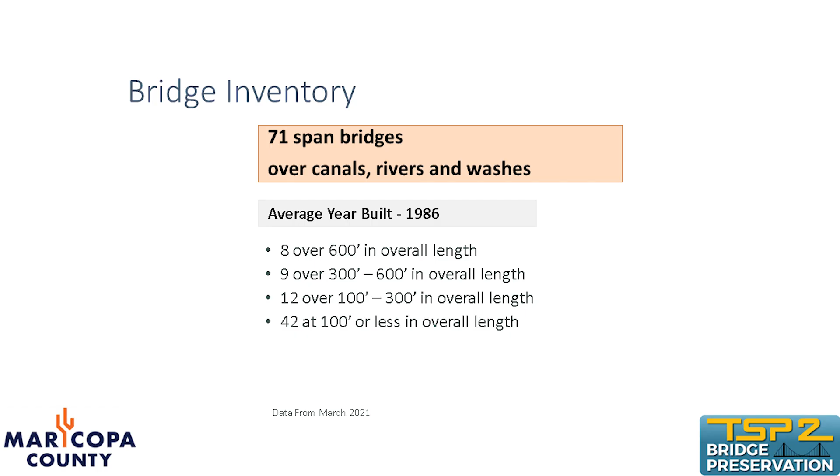We have several bridges that are pretty good size. We have 8 of them that are over 600 feet in length. Several of those are around 1,500 feet in length. They're pretty major waterway crossings. And then we have quite a few smaller, shorter bridges, and a lot of our bridges are over irrigation canals.

They have unique problems. If you've ever worked with railroads, you know how difficult it is to work with railroads. Well, irrigation companies are also somewhat difficult to work with. They usually have prior rights, and whenever you work on a bridge in their jurisdiction, you pretty much do what they tell you to do.

It's been about 6-7 years ago. Actually when I was with New Mexico, we started UHPC with New Mexico State University, and then years later I was attending a conference in Tucson, and we had a professor from ASU giving a presentation on UHPC, and he said, well, I saw that New Mexico was doing something with it, and we didn't want to be outdone by New Mexico, so we started doing something with UHPC in Arizona.

So he had worked with ADOT on a research project, and they had developed a mix at that point. And then as a county, we were interested in using it in an application. So we actually got started and did a project. UHPC, more than anything else, is somewhat like a cement rock is what you kind of end up with.

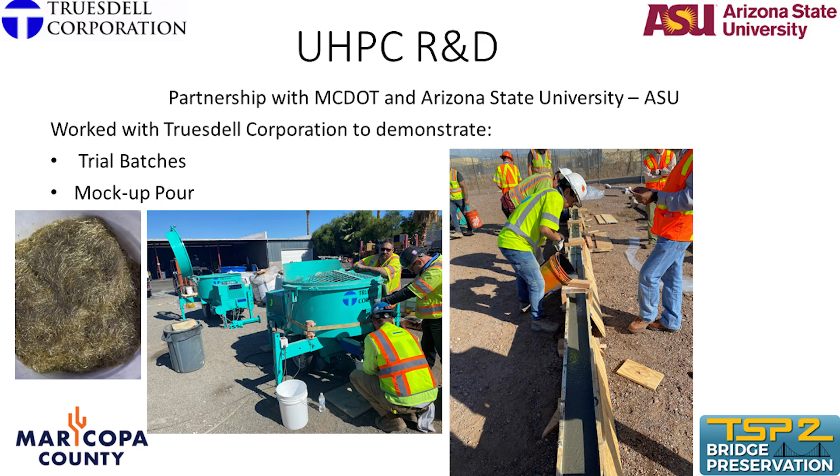And then the problem we've always had with these side-by-side pre-stressed slabs is we always use that little key joint that you just put in the little grout key, and that grout key will hold up anywhere from about 5 to 15 years, and then it's always going to fail, and then you start to get water through the joints, and then eventually the slabs start acting independently, and they don't act together as the structural engineer intended.

UHPC is a very unique material. It's a very good material. But like I say, if you go to use it, don't expect that it's just that easy of putting out a specification and the contractor's going to do it and everything's going to turn out perfect. You're going to have to spend a lot of time with it, and you're going to have other people on your team that are going to have to help you and make sure you get it right.

This was our bridge that we finished. We took the easy way out, I guess. We basically poured the joint with UHPC. In this case, I believe we used about 8 to 9 cubic yards of UHPC to fill 13 joints, and the joints were roughly 38 feet in length or so.

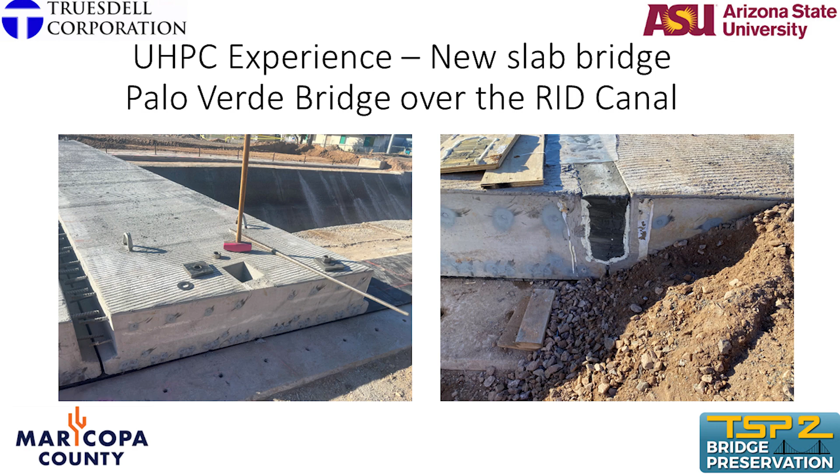And then when we were done, I know a lot of people will pour that UHPC a little bit higher and then grind it off and make it equal. I guess we took the easy way out. We covered it all with asphalt when we were done. So we were trying to make it easy for the contractor and for us and for everybody. We didn't want anybody to feel like they had to take on a lot of extra risk on something that would be problematic. So anyway, we're very happy with our structure.

Like I say, we had those UHPC reinforced keyways, and boy, I'm confident they will outlast the pre-stressed members. And the loading as you're out on the bridge now, where before we had 4-foot wide slabs, and you could see the different deflection with the existing girders, and I really don't think we'll see any leakage between the slabs anymore, so we're very, very happy.

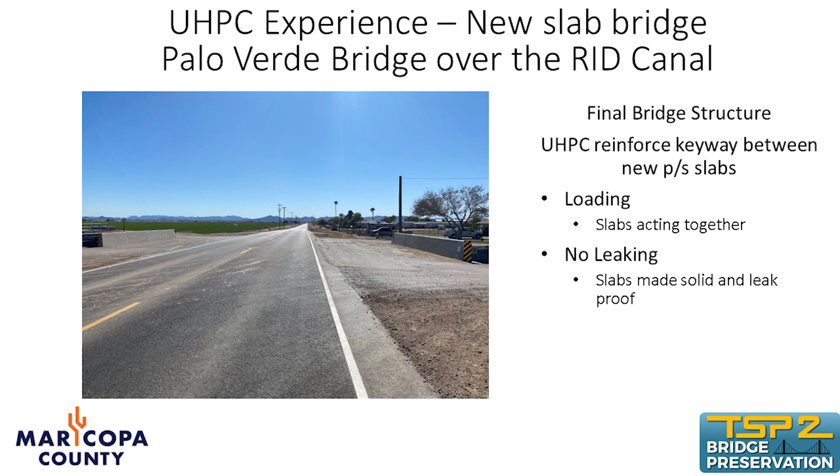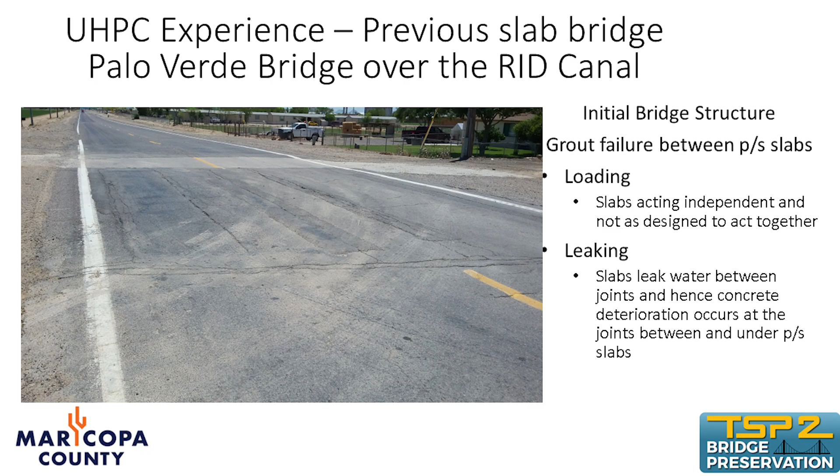I don't know if you can see these photos very well or not, but these were photos of the old bridge, and you can kind of see longitudinal gaps right over those grouted keyways. And our maintenance folks were out there about every 9 months patching the asphalt on this bridge. And this was near a dairy, and we probably had 100 to 200 trucks a day going over this bridge. And the truckers learned real quick. They would always slow down when they came to the bridge, and it was problematic.

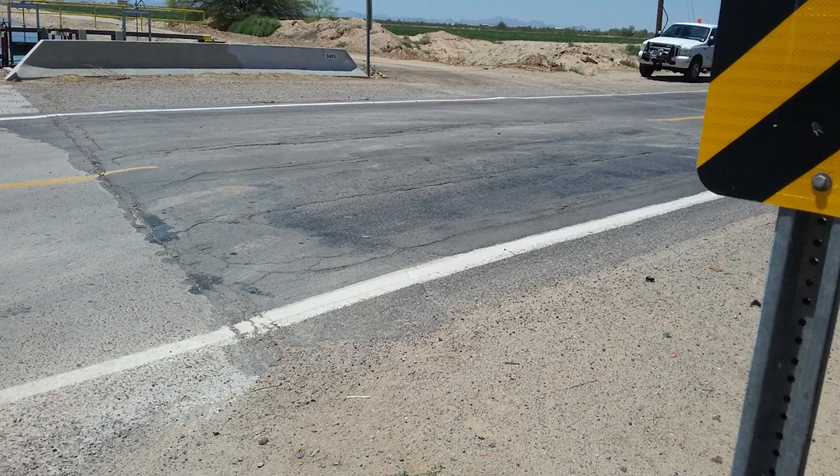Each of these slabs were acting independently. There was a lot of leakage, and then when this bridge was built, it raised the canal. So the bottom 6 inches of the bridge actually was in 6 inches of water for various times during its life. So the bottom of the pre-stress was in the wet, dry zone, the worst place you could have had it. So when we built the new bridge, we actually raised the bridge up about a foot or so, so we won't have the bridge in water anymore.

And you can just see some of the problems, but we used to have our maintenance crews out there patching it all the time. You can see the canal just barely in the upper left. But anyway, that was our first project, and we thought it was a success. We're very pleased, so we're planning another project now with UHPC.

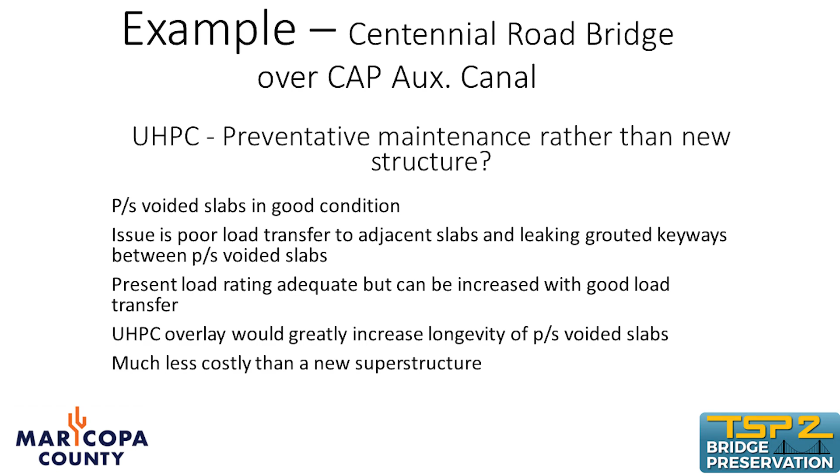So we have a lot of these side-by-side voided slabs that have the grouted shear key, and overall the pre-stressed voided slabs are in good condition. The whole issue is we're not getting a good lateral load transfer; when one side deflects, it doesn't bring the adjacent slab down with it. And so we're kind of like, well, what can we do to get this to work? And we think we can use UHPC to make these existing slabs act together by doing a retrofit.

So we have this existing bridge over a canal. It's 52 foot wide, so 52 divided by 4, it's got like 13 panels, I think, or maybe that's not right, whatever the number is.

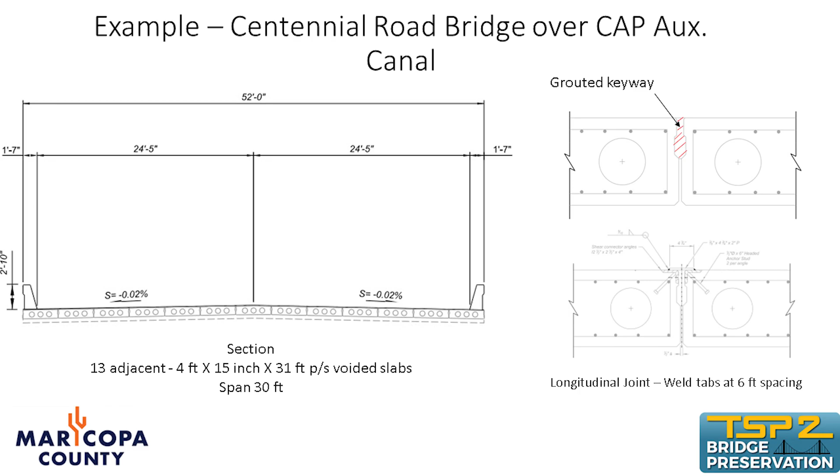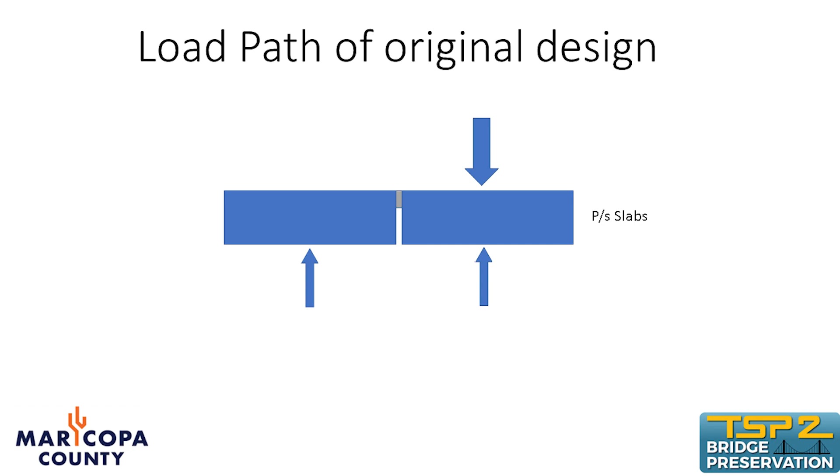But anyway, we've got that regular grouted keyway, and that's the one that always fails. Anybody that's been around these bridges, you just know that grouted keyway doesn't last very long. And so the original load path of the original design, we're basically saying we want the truck on one of the pre-stressed slabs, and we would like the load to be taken by some adjacent slabs as well.

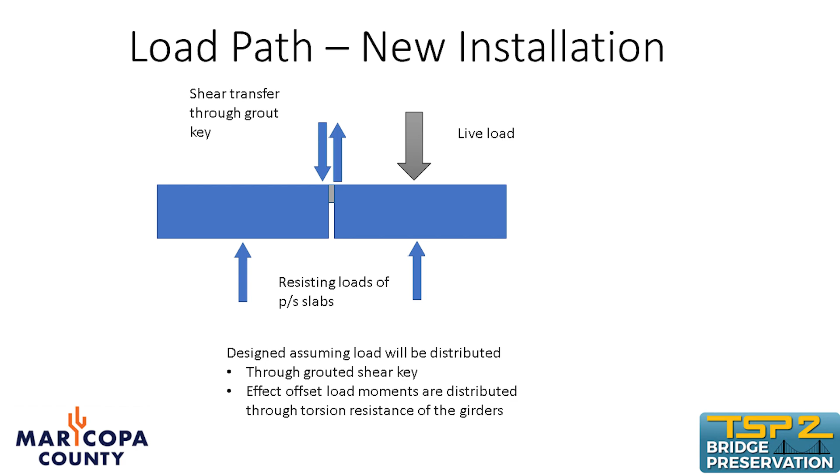And then if you look at the load path of that, you've got to get that shear key to work. If that shear key doesn't work, well, then you've got this happening. You've got basically all the load taken by a single panel, and even if your bridge is strong enough to handle this, the issue is you're getting water in that shear key, and you're getting deterioration, you're getting problems. Water is one of the worst enemies we have to civil structures.

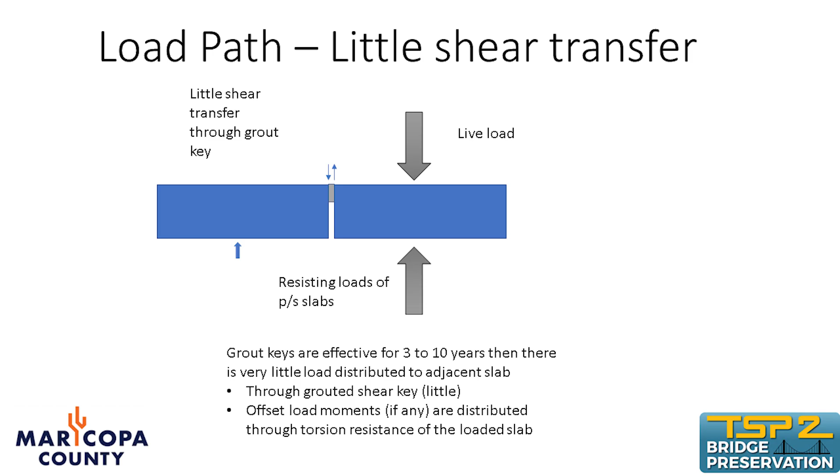So anyway, we were looking at ways that we could retrofit. We'll take this bridge here that has these grouted shear keys that don't work, and we're trying to come up with some sort of load transfer mechanism. We've come up with a way with UHPC, where UHPC will develop a bar, like a number 6 bar, in 5 inches, or a number 8 or 10 bar, you only need 7 or 8 inches of development length. So we're thinking we can use UHPC to get this load transfer to happen.

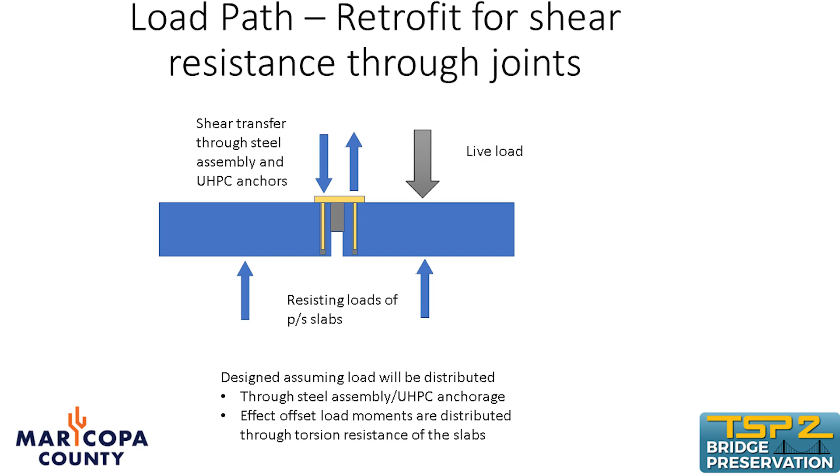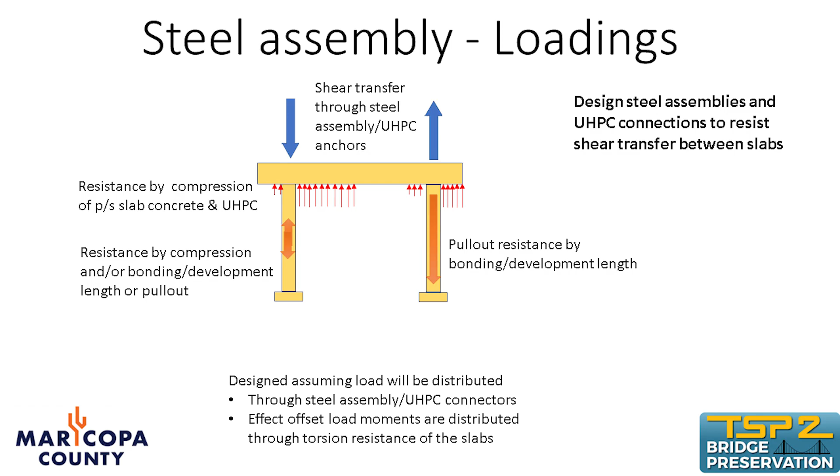I'm looking at putting together a steel assembly. It'd be like staples along the joint. You'd put these staples in every 6 feet or so along the adjacent slabs. And as you look at the loads, you're like, well, how would the loads get transferred? I said, well, if I just take a regular axle load from an HS20 truck, and if I'm able to transfer that with one of these staples, that should be a pretty good number to use.

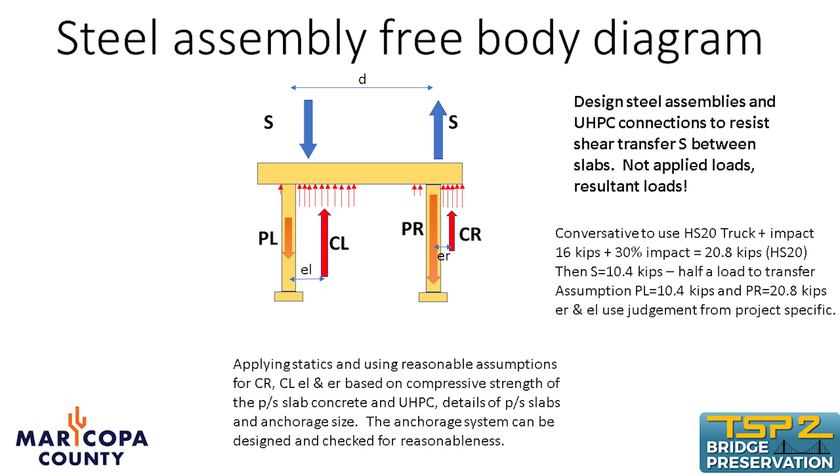So basically, I was taking a 16 kip load with a 30% impact, so I'm taking 20.8 kips, and I'm trying to get half of that to transfer across through one of these staples. If I put some numbers to this, I'm going to assume that I don't have any compressive reaction on the left from the concrete, and I think I can get the pull out on the right side there, the 10.4 up and 10.4 down. And on the other side, if I draw a free body diagram of this whole thing, I'm pretty sure I can get a pull out of the 20.8 kips.

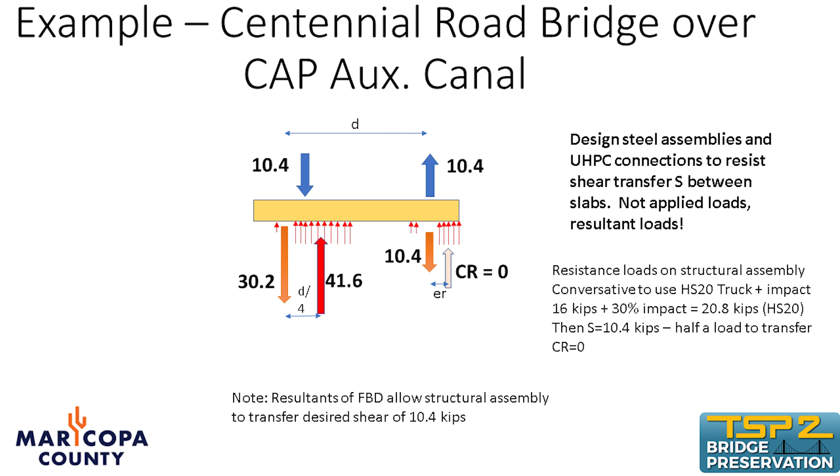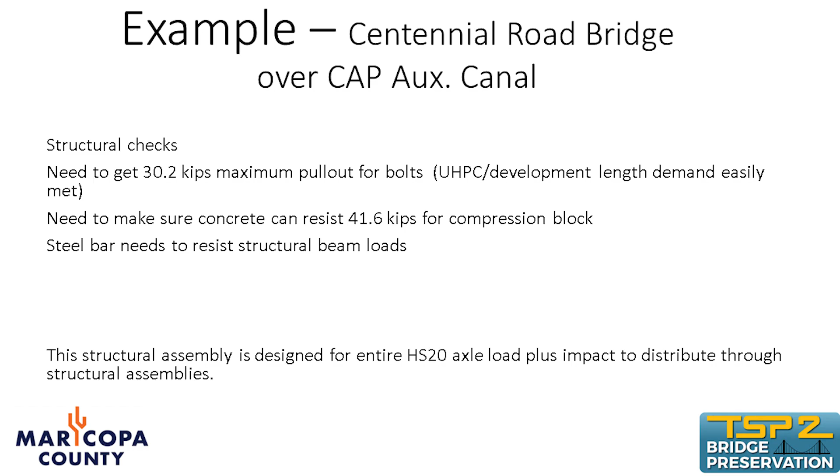But anyway, I'm pretty confident that I can work with UHPC and do a retrofit on these structures. You can run these quite a few different ways. The other thing I can do, I can always put more staples in. Instead of putting them at 6 feet apart, I can put them at 3 feet apart if I need to. But the bridge we're looking at now, we're looking at putting these structural assemblies or staples in at about every 6 feet.

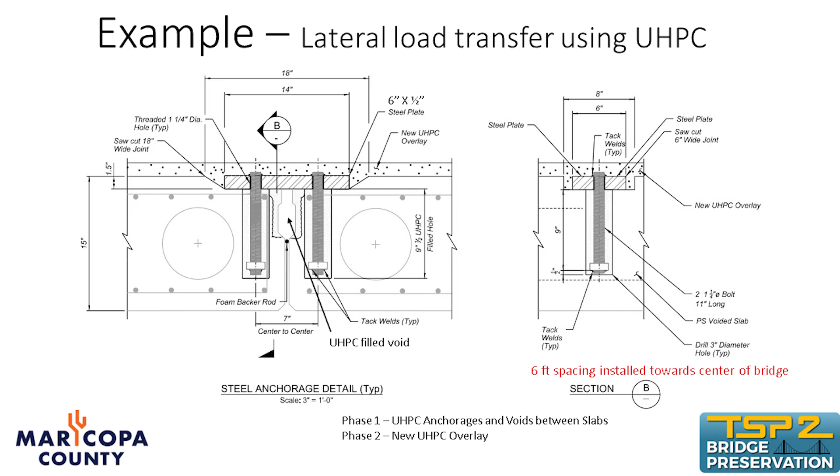We're basically coring some holes in each of the adjacent voided slabs, and we're cutting out the existing shear key. Then we're going to pour the core holes and the part we cut out in the middle where the old grout key was, and fill that all in with UHPC at one time. And then as a second phase of the project, we'll put an overlay, either a UHPC overlay or a polyester overlay, depending on our research. So that's what we have coming up.

But anyway, we're looking forward to working with UHPC in the future. I see that it has a place for our industry and for preventative maintenance type projects. And we're looking forward to doing this Centennial Road Bridge, trying to get these slabs to work together. We're hoping to do that later this year.

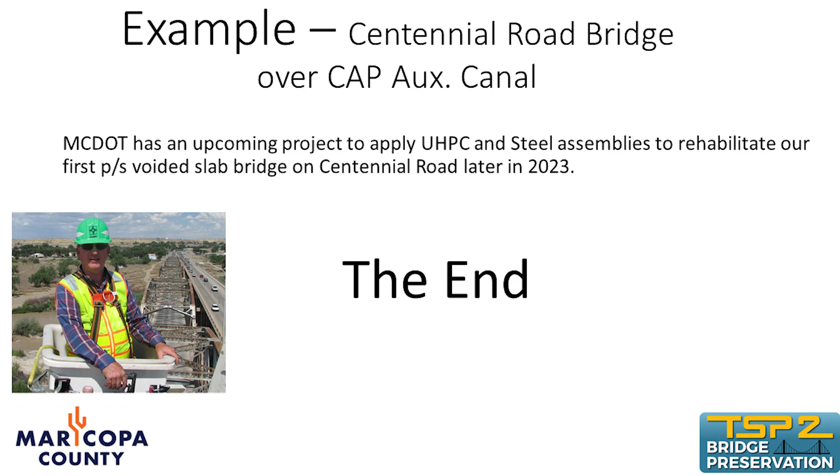So is that UHPC mix not proprietary? Because one of the issues some states are facing is the proprietary UHPC mix and speccing that into jobs, so states are looking to develop that independently. Yeah, that's correct. This is a non-proprietary UHPC mix. New Mexico State University had somewhat worked on it, and then ASU had started and done it with Arizona materials. So yeah, it's a non-proprietary mix.